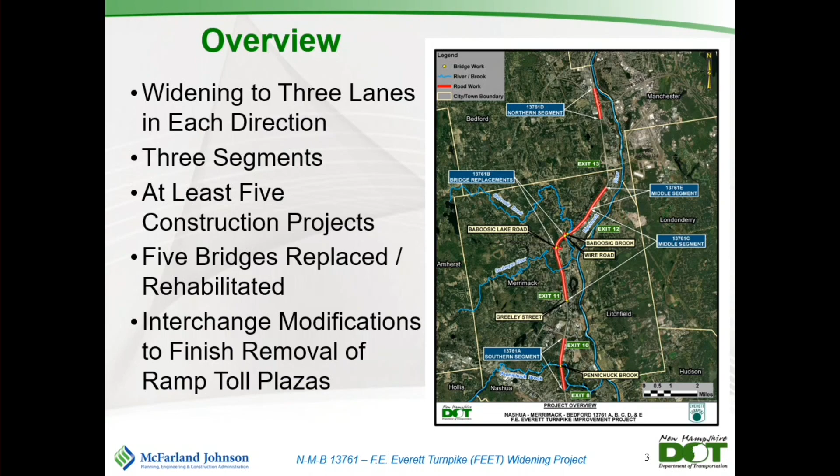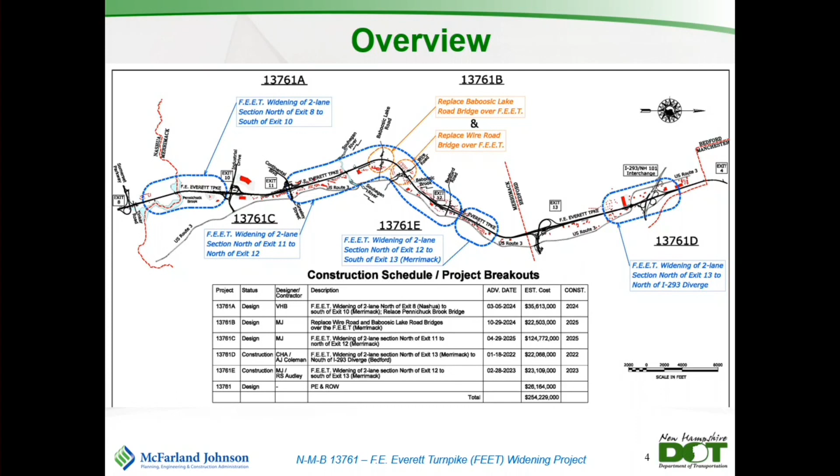The project we're talking about tonight is the orange project, highlighted there in orange, to replace Baboosic Lake Road Bridge and the Wire Road Bridge over the pike. The estimate for this project is around $22.5 million of the total construction budget. This project needs to be completed before the section that's underneath it, what we're referring to as the 13761C project. Before that can go, we have to get the new bridges in place.

This probably doesn't need a lot of explaining, but the need for the project is to reduce congestion and improve the ability to move up and down the corridor. With congestion, there are some safety concerns as well. We're going to be doing some other improvements: improving sight distance along the turnpike, replacing old guardrail to new standards, widening shoulders, and installing new signage, all included as part of the project. And as I mentioned, we're improving the bridges and the structures that carry some streams underneath the turnpike.

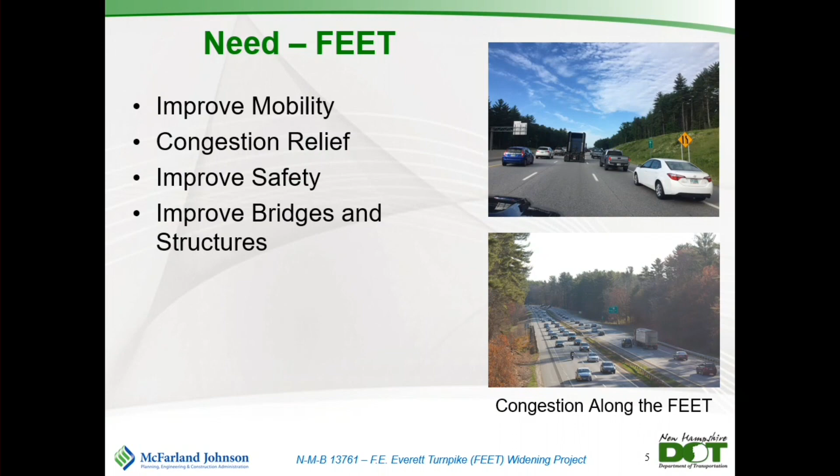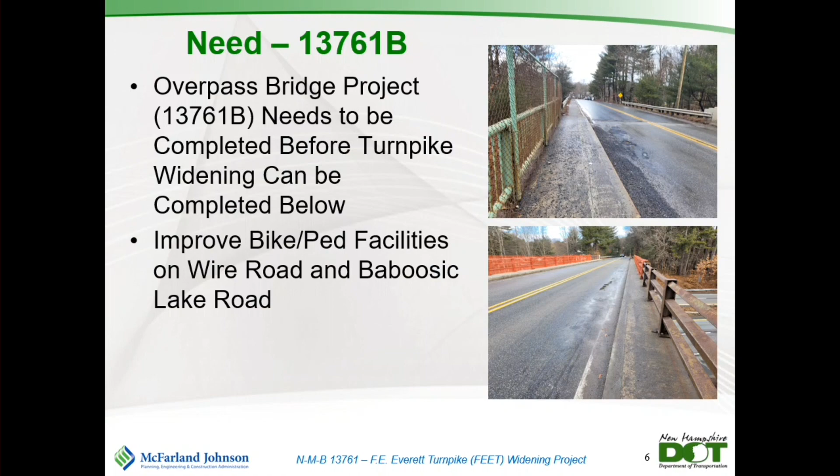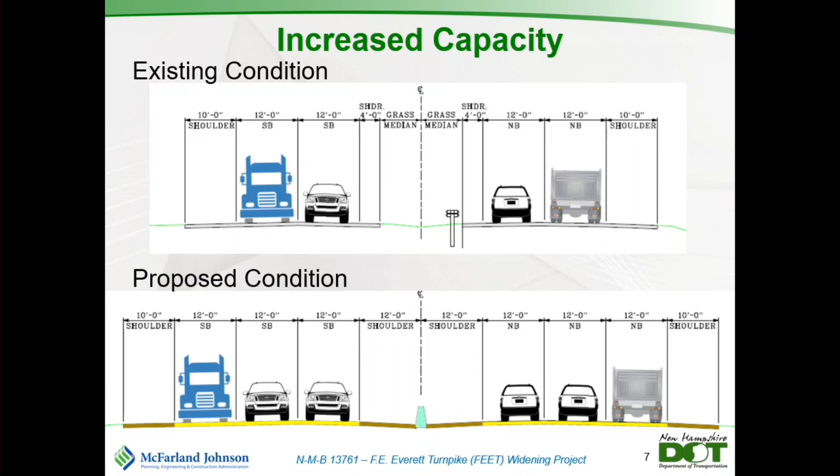So getting a little bit deeper into Baboosic Lake Road. This bridge is not in the greatest condition now. It's on the state's red list. We are proposing to replace the bridge pretty much right where it sits now. We're going to be raising it about 5 feet to accommodate getting rid of the piers. In the end, we'll have new sidewalks on both sides of the road that extend from Rose Lane to O'Gara Drive. And as part of the widening, we're also going to include some stormwater treatment for both the two side roads and the turnpike to make sure we're hitting stormwater treatment goals.

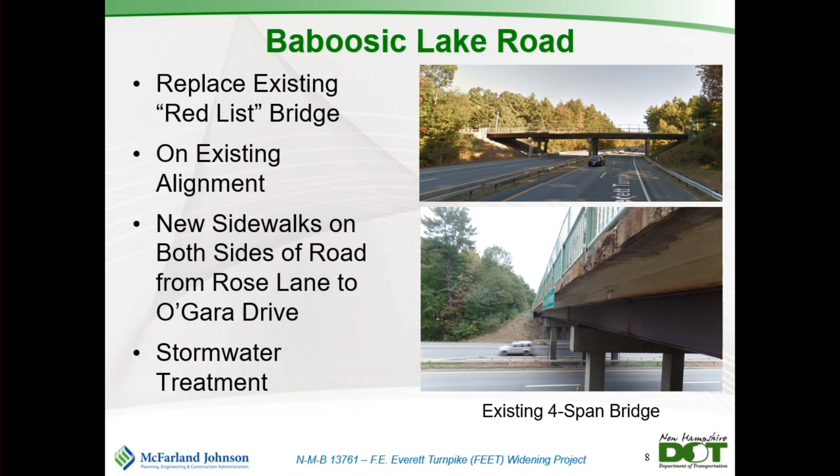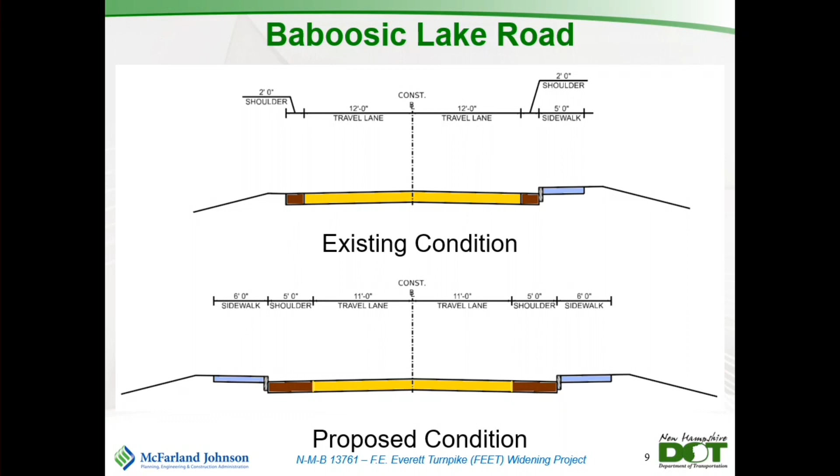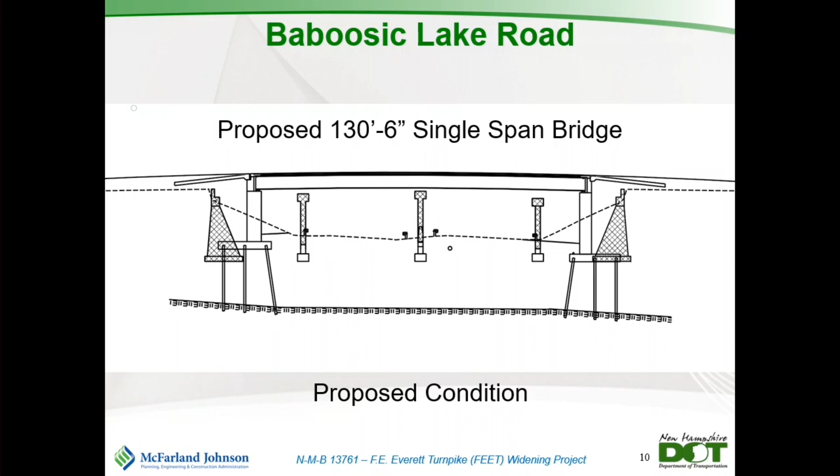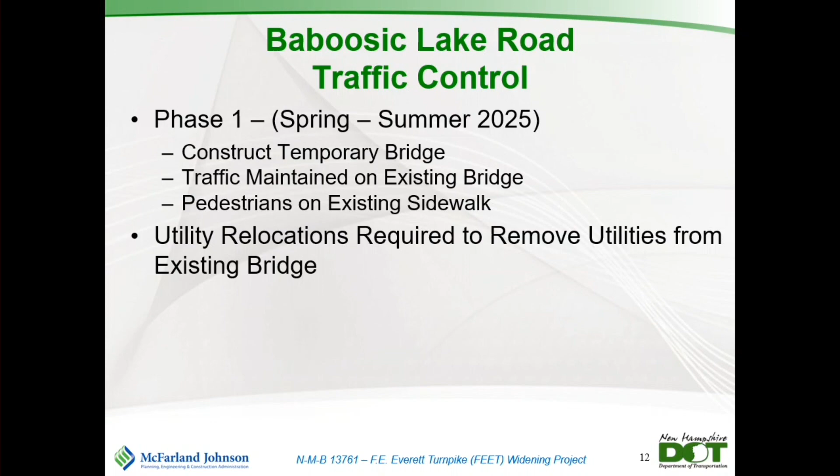So in the spring to summer of 2025, we're going to build a temporary bridge to the south of the existing structure. So traffic will be on the road right where it is today, and pedestrians will be able to use the existing sidewalk. While they're doing this, there are also some utilities located on the existing bridge, and we're working with those utility companies to get those relocated. That relocation effort starts about the same time that our contractor would start building the temporary bridge.

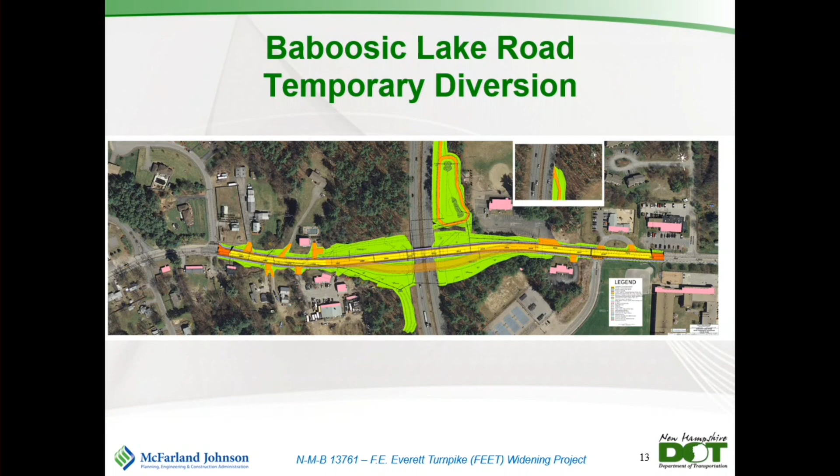As soon as both of those two things have occurred, we will shift traffic onto that temporary bridge. This will allow the contractor the room and space to build the new bridge. Well, first they have to remove the old bridge and then build a new bridge in its place. And so the second plan that we're showing is showing all the same information as the first. It's just showing where that temporary structure is going to be located, and really helps to explain why we have all that slope work on the south side of the bridge.

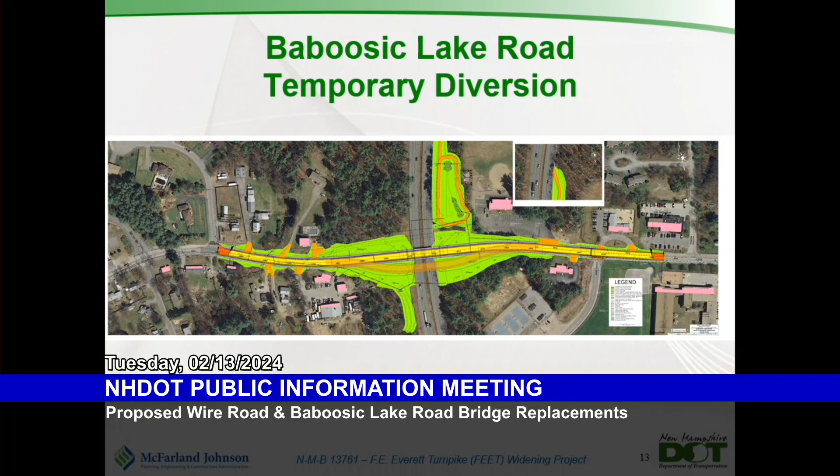So during that second phase, as I mentioned, it's going to start, we anticipate, in the fall of 2025 and extend through the summer of 2026. Traffic will be on that temporary bridge, two lanes, so one in each direction. There's also a sidewalk on the temporary bridge. So pedestrians will continue to be able to walk along the south side of the road. And during this time frame, they'll construct the new bridge.

This is where the construction schedule really can start to depend on the weather. So if we have a mild winter, the contractor may decide to work a portion of that and finish a little earlier, or if it's a difficult winter, this could extend into, say, the fall of 2026.

So after the new bridge is constructed, we move into our third phase of construction. So traffic's back on the new structure. As part of that construction, we will have built the new sidewalk on the north side of Baboosic Lake Road. So we'll be able to shift pedestrians onto that side while they clean up and remove the temporary bridge on the south side and finish that sidewalk construction on the south side. Once the new bridge is operational, we'll give the utility companies the opportunity to relocate back onto the structure, and are working with them on nailing down that timeline.

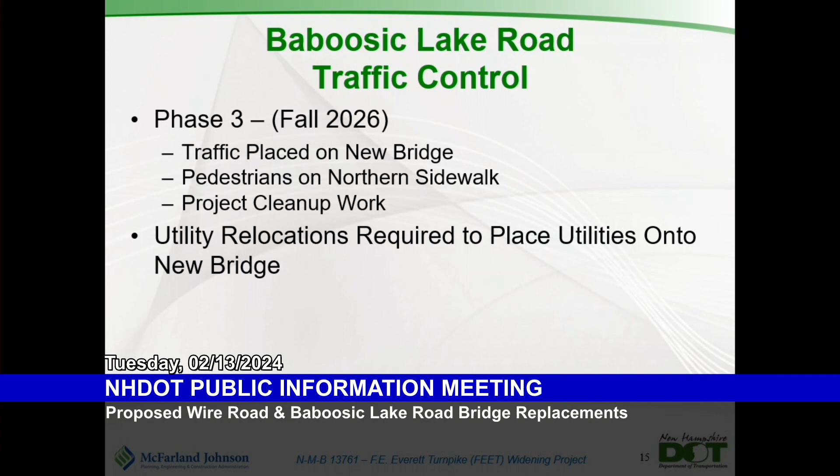So for Wire Road, a lot of the needs are the same. It's a red list bridge. For this, we had the opportunity to look at constructing the new bridge to the north of the existing. So there will be no temporary bridge, and I'll get into that in a little bit. Currently, there's no sidewalk on Wire Road. We're proposing a new sidewalk on the north side within the project limits. And again, there's some stormwater treatment basins that will be constructed as part of the project.

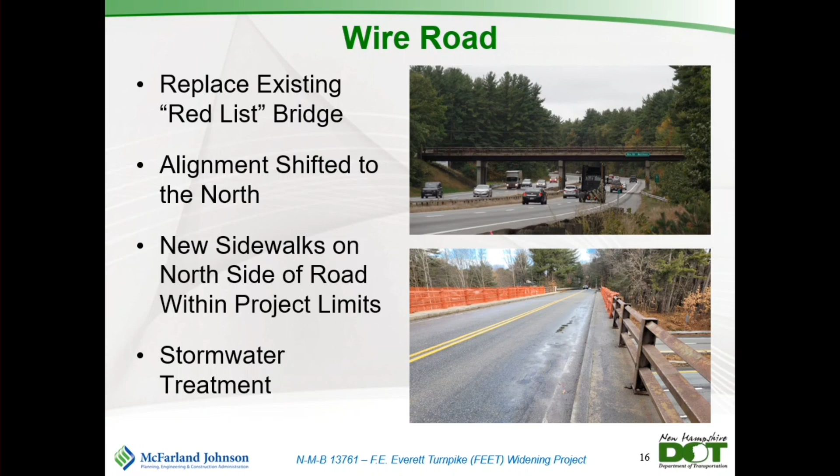So existing, Wire Road has two 11-foot lanes and narrow 2-foot shoulders. And I understand it probably feels quite treacherous trying to walk across that bridge in its narrow state. So in the proposed condition, we're going to keep the two 11-foot lanes. We'll widen out to two 5-foot shoulders to help with the bicycles. And we're going to add that 6-foot wide sidewalk on the north side of the road.

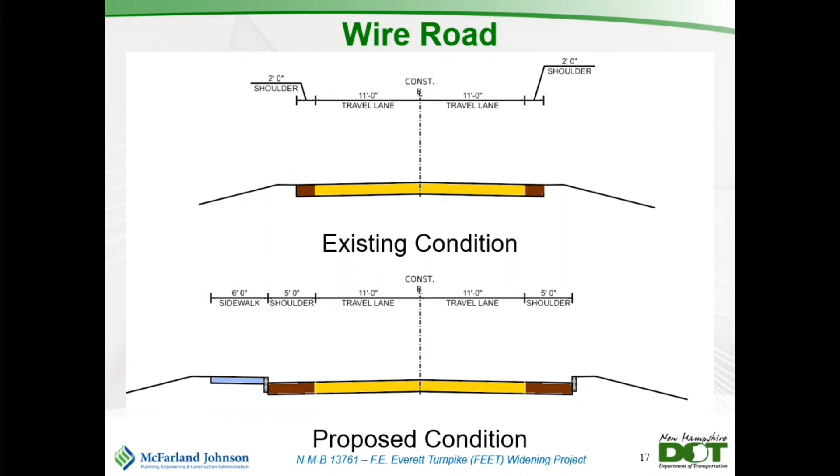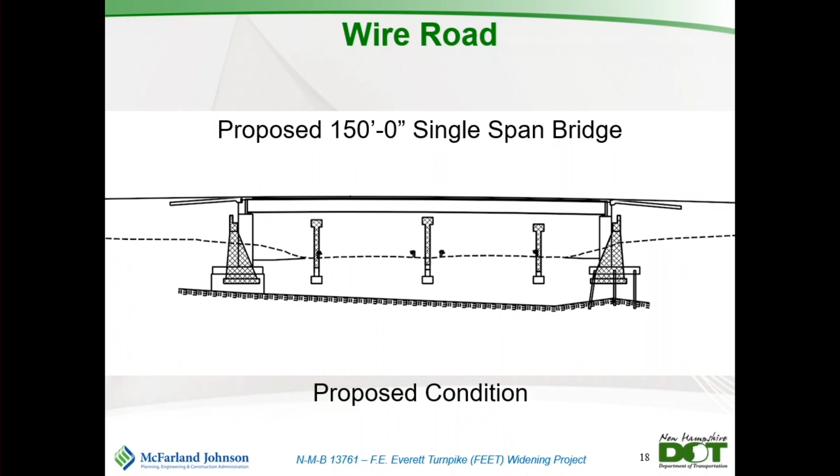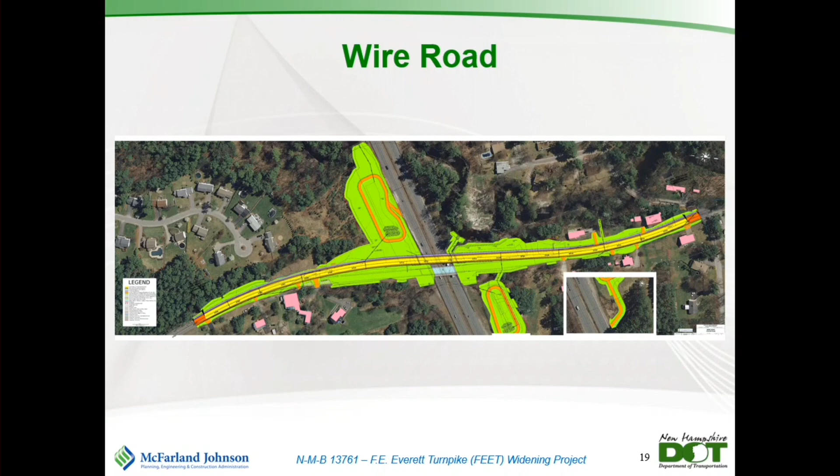Because we shift to the north, we get a little bit closer to Baboosic Brook on the northeast quadrant of the bridge. So we are proposing a retaining wall along that portion of the roadway to avoid any impacts to the brook. So just zoomed in a little bit here to highlight the shift in the new bridge location.

So this is our phase 1 construction. It would start in the spring of '25. And we would build the new bridge in its entirety and some of the approach roadway work while we maintain traffic on the existing bridge right where it is today.

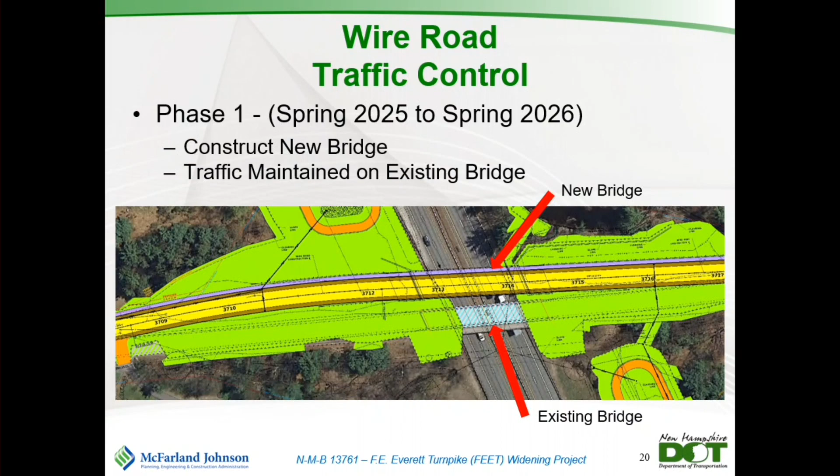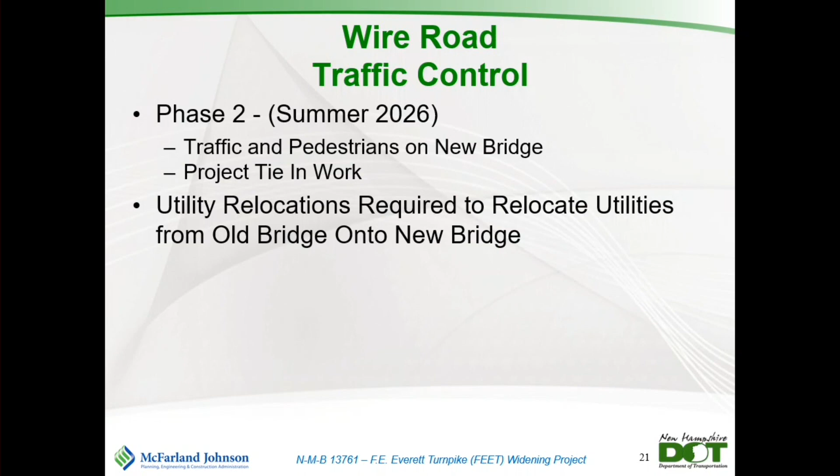Summer of '26, we would be able to open the new bridge. That's the anticipated date to both traffic and pedestrians at that point. So we should have most of the sidewalk built, certainly on the bridge, and much of the approach work will be done. And really using the rest of 2026 to do some project tie-in work.

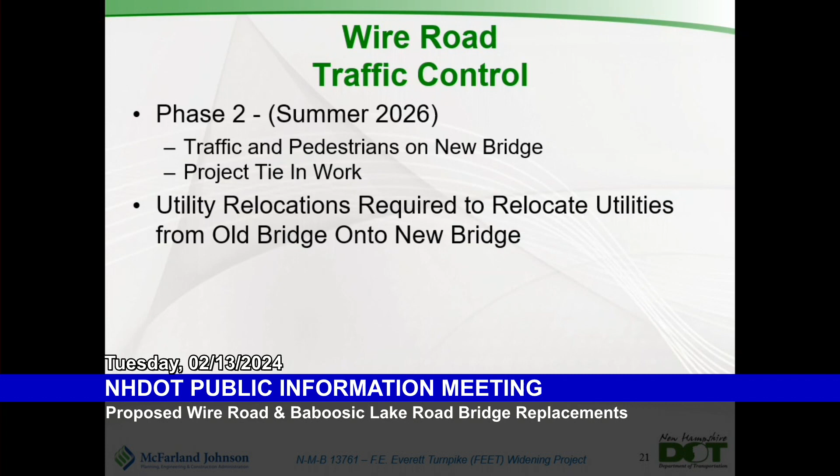What will be taking a little bit of time here is our existing utilities on the Wire Road Bridge that need to move from the old bridge to the new bridge. So that will be occurring in 2026 as well. And that has to be completed before we can get to phase 3 and remove the old bridge and do that final project cleanup work. So we're anticipating this will be in the fall of 2026 or potentially even spilling into 2027.

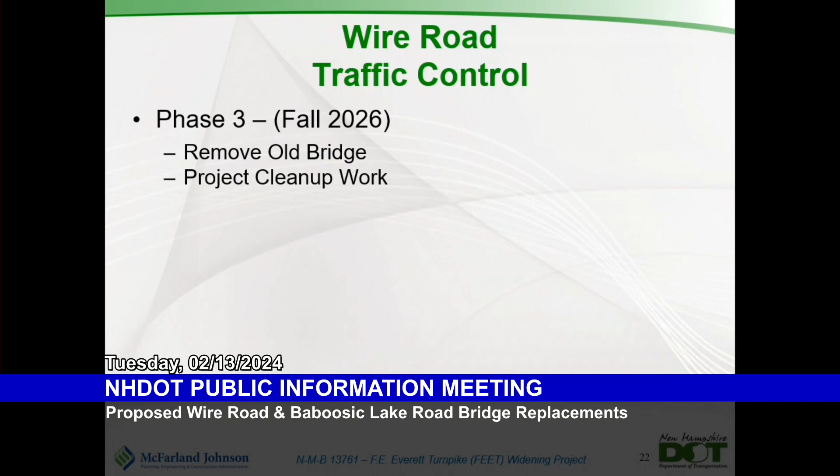For people driving on the turnpike, there will be intermittent construction impacts along that roadway throughout the construction duration of this project. So from 2025 to 2026, we have to reconstruct some of the drainage under the turnpike, and we have to remove the existing bridge piers and the existing bridge abutments. We have to take the old bridge out.

So you'll see various lane shifts, but we're keeping 2 lanes going in each direction throughout the day. And there will be some nighttime lane closures and some rolling roadblocks. That's where we slow traffic down on the turnpike to give a gap where there's nobody going under the bridge for a good portion of time for the contractor to, say, pick up an old beam and do it safely without having to worry about people driving underneath while they're doing it.

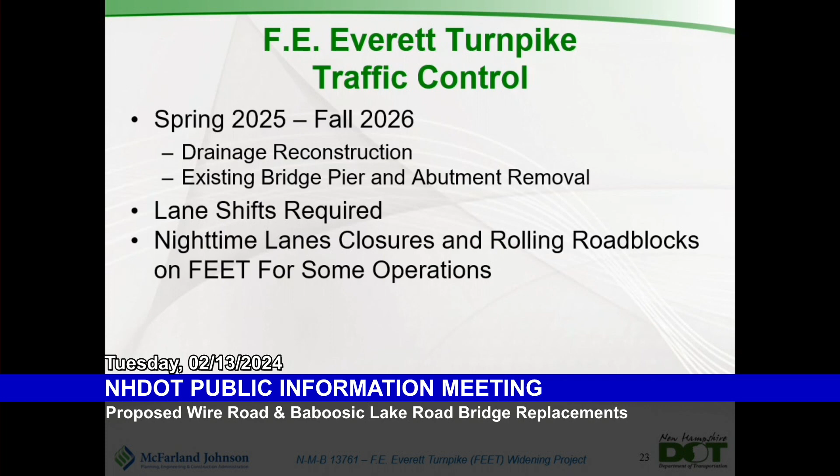So that will be happening intermittently between 2025 and 2026. And those instances typically get noticed well in advance. At this point, I'll hand it over to Dina to explain the right-of-way process.

Thank you, Brian. All right, so what we need to do is we need to create the property impact plan, and that's currently being worked on as we're sitting here tonight. Maybe not right now, but maybe tomorrow morning.

Anyway, so what happens is we have to do evaluation of the impacts to the project and the people that own property that abut our property. We will ride the project, we will look at the impacts, we'll take a look at the severity of it, and we will assign an appraiser to it. They will value the land. We will then send out an agent who will present that appraisal as the fair market value for the property impacts to your land.

Then we'll enter the negotiation stage. Then hopefully we'll sign, seal, and deliver the agreement. But if we don't agree, you do have the right to negotiate further with us. But ultimately, if we just reach a stalemate, then we'll actually end up doing the eminent domain, and we could go through the condemnation process.

And sometimes that sounds awful. Really, sometimes it's not. It may depend upon, there might be a flaw in your title, and the only way we can obtain the ownership of those impacts is by filing the condemnation.

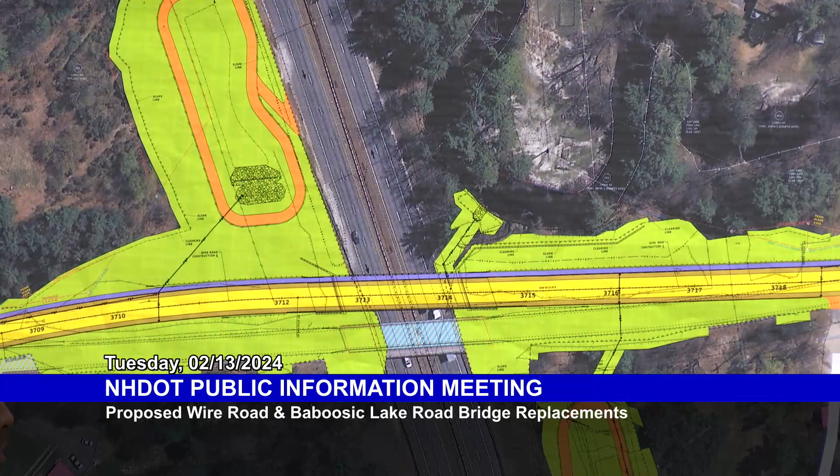Mark Epstein, 15 Wire Road. I'm one of the abutters. We've already talked. Just so that I understand correctly, on those plans, the blue line, that's only a temporary... So the thin blue line is the existing town right-of-way line. Okay. The other line, the green is what? The green would be, on your parcel, a temporary easement. So the temporary easement goes away after construction, correct? Yes. Okay, I just want to make sure that that's clear. All right. Thank you.

Any other questions? Make sure there's a green light on. Yes, it is. Okay. Am I coming through all right? Yes. Yeah. My name is Nelson Disco, and I'm chairman of the Merrimack Town Center Committee.

Our committee is charged with the task of making a more walkable town, especially in the center of Merrimack. And I want to applaud the inclusion of sidewalks that you've done here. I wish we had one on both sides of the road, crossing at the Wire Road, but anyway, we're very grateful for what we've got, and we wish we had more.

But it all ties in with another project which is coming. I presume you're working with those who are designing the new Baboosic Brook Bridge on Route 3, which will tie into this. And I'm hoping the interface is a smooth and continuous one for pedestrians and traffic. Okay. Thank you. Thank you. Any other questions? Guys are a quiet group.